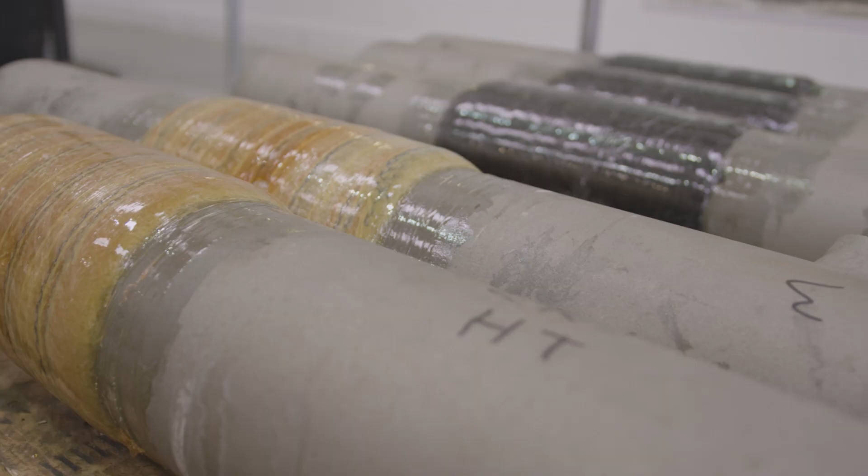With the growing challenge of aging assets and the requirement to repair existing infrastructure, TechnoWrap can help to extend the operational performance of your assets.

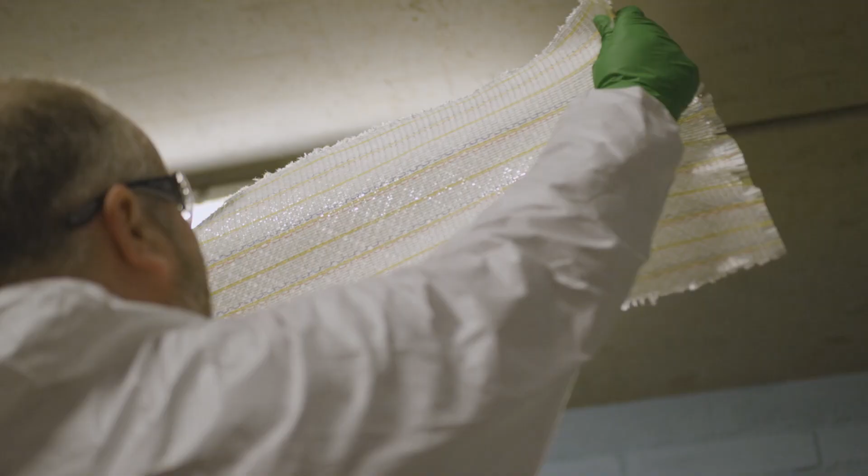Established by Walker Technical in 1992, TechnoWrap is now part of the ICR Group and a market leader in engineered composite solutions, carrying out tens of thousands of repairs worldwide.

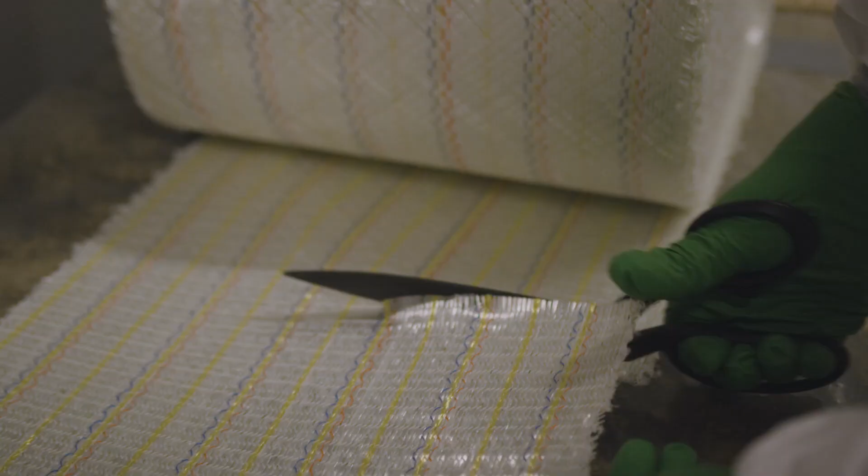The versatile product range offers practical and cost-effective solutions capable of rehabilitating pipelines, pressure systems, and structural components that have been damaged or weakened by corrosion.

The range combines either triaxial glass or quadraxial carbon fiber, combined with a variety of epoxy resins that are suitable for a range of design or environmental requirements.

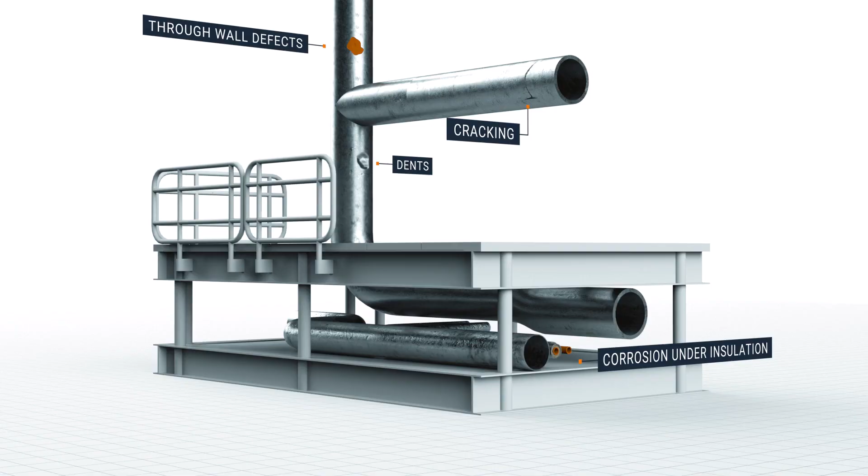Composite repairs can be used for repairing internal and external corrosion, through-wall defects, as well as mechanical damage and cracks under certain conditions. They are suitable for use on pipework and piping components, valves and flanges, as well as repairs in the splash zone.

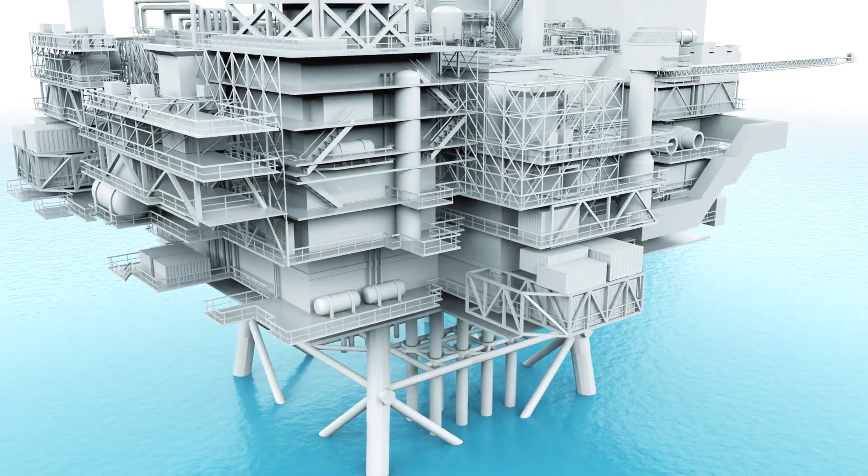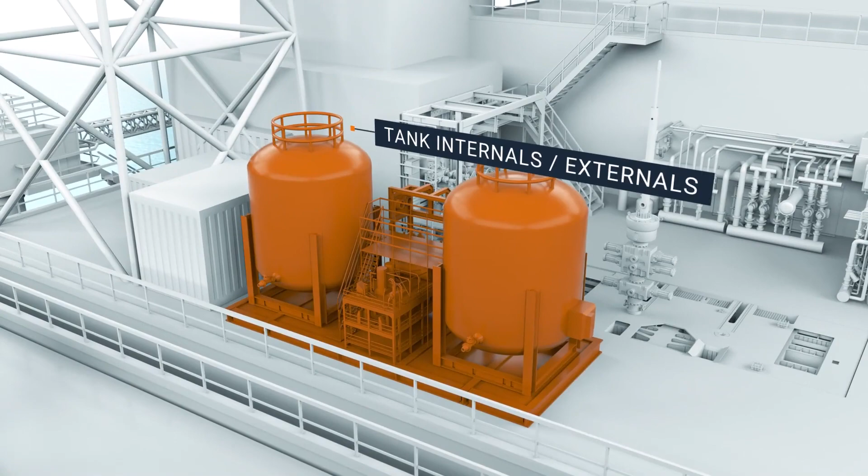We also have significant experience repairing structural components, including decks, roofs and walkways, beams, caissons and risers, blast walls, tanks, and vessels.

TechnoWrap can be designed for high pressure and high temperature environments, and in many cases can be applied live with no shutdown required, saving time and money, avoiding major impact on production.

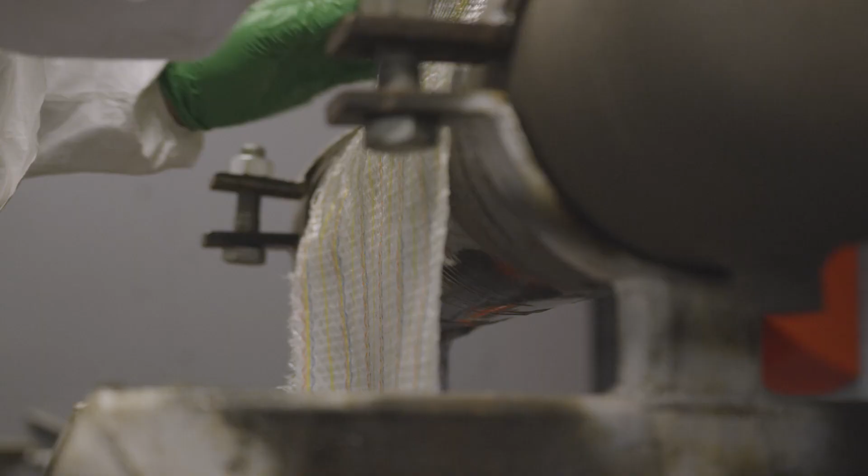Our products are internationally recognized, tested and qualified to ISO 24817 and ASME PCC2, and have been audited by independent third parties Lloyd's Register, ABS and DNV.

Our engineering team can provide a 24/7 response where each custom design calculation is carried out to code requirements and validated by a range of testing.

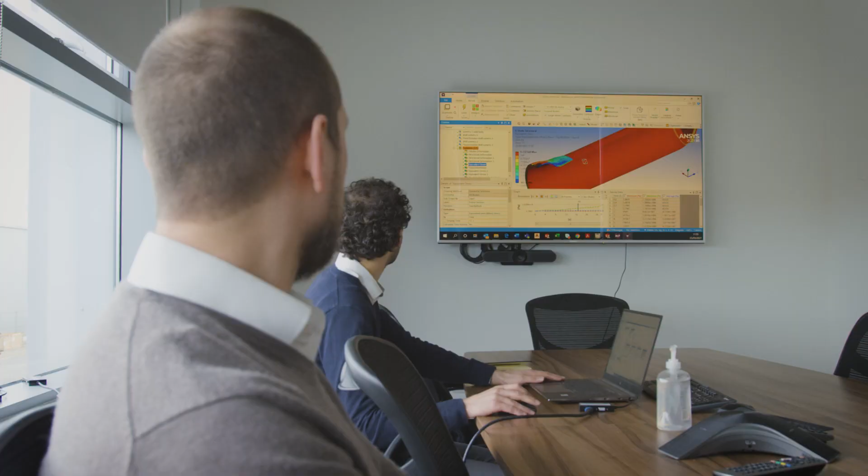Should added assurance be required, ICR can provide client-specific testing and finite element analysis for complex design scenarios.

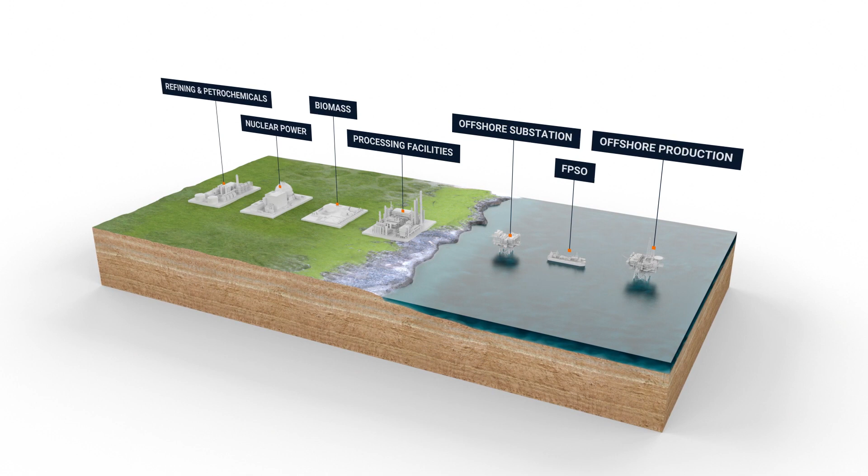ICR has experience across a range of industries, both on and offshore. We are continuously looking at ways to enhance our longevity and assurance through our technological innovation and R&D.

By providing TechnoWrap training to our international partner network, we can significantly reduce our global travel and emissions and help to support local economies. At ICR, we offer high-quality engineered solutions with a continuous focus on safety, efficiency, and reliability.